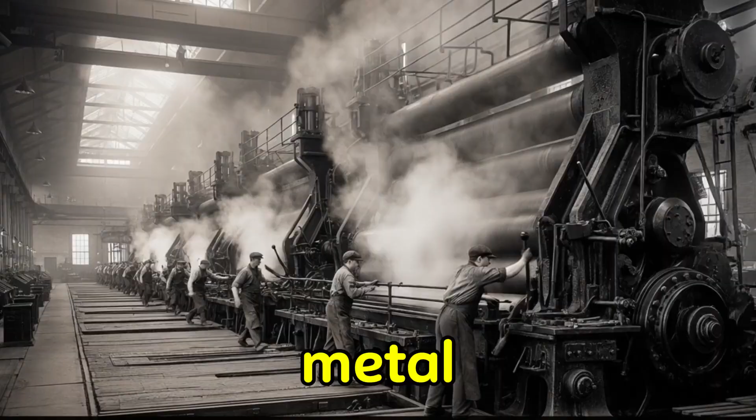Shaking when the morning crew takes their positions. Rolling mills thunder in sequence. Steam hisses through iron pipes bolted high in the rafters, and the air carries the permanent smell of hot metal and coal smoke. Workers shout to each other across the floor, but the noise swallows their voices before the words arrive.

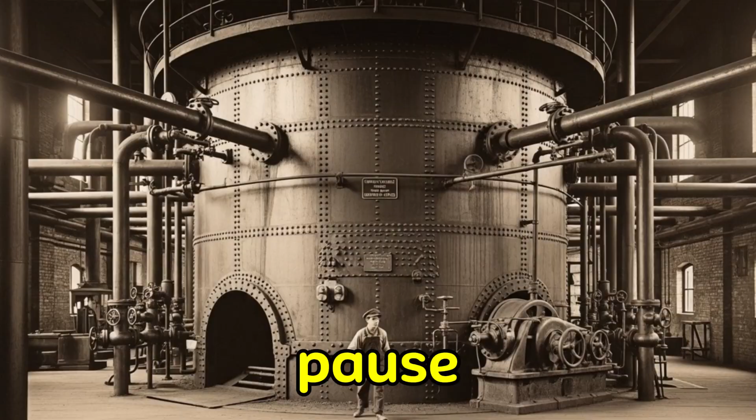At the center of all of it sits a machine most of these men will never see directly, a massive high-pressure steam boiler. It powers the pumps, the furnaces, the rollers, the valves that move molten steel from one end of this mill to the other. Nothing runs without it. Inside the vessel, water presses against steel walls under crushing force. The temperature climbs without pause.

The pressure follows. This boiler has not rested in years. Day shift, night shift, 12 hours at a stretch. Maintenance deferred. Inspections completed on paper, not in practice. Production quotas do not pause for inspections. The steel shell has been failing slowly, scale accumulating on interior walls, microscopic cracks spreading through metal that was never meant to run this hard for this long.

The warning signs exist. No one with authority to stop production is looking for them. Then the men nearby hear something that has no name in their daily vocabulary, a low metallic groan, deep and resonant, like iron being bent past its limit. The boiler ruptures in under a second.

Superheated water becomes steam instantaneously. Steel plates tear apart. Rivets shear free. The force that was powering a steel mill is now moving through the men who ran it. When the air clears, 146 workers are dead. Most never understood what was happening.

The question is not whether this mill was dangerous. The question is who knew and what they chose to do with that knowledge.

America at the turn of the 20th century is being remade from the ground up, and the material doing the remaking is steel. Railroads push across the continent. Bridges span rivers that once stopped cities from growing. Skyscrapers begin their climb into urban skylines. Every beam, every rail, every engine component originates inside mills like this one, vast, deafening, relentless.

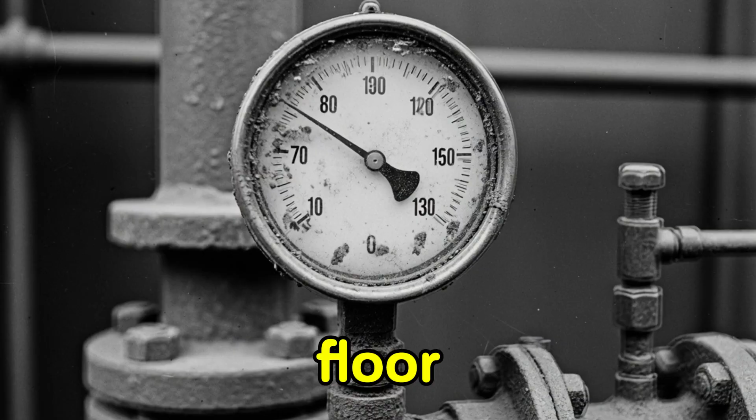By the early 1900s, American steel production has become one of the largest industrial enterprises on Earth. Hundreds of thousands of workers report for their shifts inside these facilities, day and night, without pause. Powering nearly all of it is steam. Before electricity reaches the factory floor, steam boilers are the engines of industry.

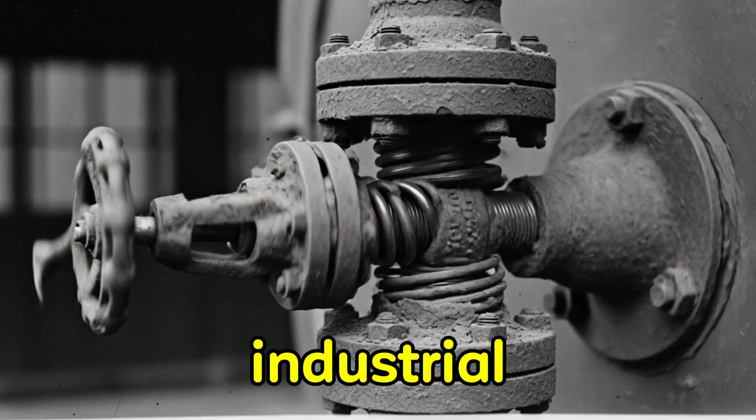Coal burns beneath enormous iron vessels packed with water. Heat climbs. Water becomes steam. Pressure drives pistons, turbines, and rolling mills. The technology is effective, and it is merciless. A standard industrial boiler operates at temperatures exceeding 300 degrees Celsius, under pressures that would destroy an uncontained vessel instantly.

Engineers of the period understand this. Newspapers of the late 19th century carry occasional reports of boiler explosions that level factory buildings and kill dozens of men in a single moment. Some engineers describe poorly maintained boilers in direct terms. Pressurized vessels operating beyond their limits are not equipment.

They are deferred disasters. Production does not slow. Boilers run for years without full inspection. Safety valves exist on paper, and sometimes in practice. Maintenance is scheduled around output, not risk. For the men working the floor, the boiler room is simply background noise.

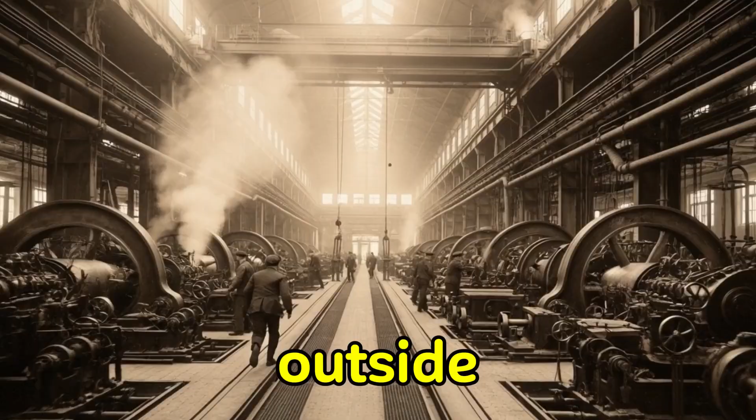Heat, vibration, the low constant rumble beneath everything. They do not think about the pressure building inside those iron walls. Most of them never get the warning they deserve. A steam boiler looks, from the outside, like something built to last forever. It is a massive steel cylinder, solid and imposing, anchored to the mill floor with the permanence of architecture.

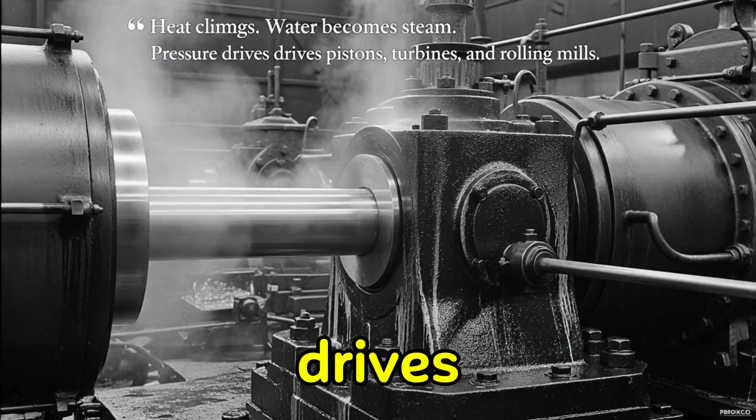Nothing about its exterior suggests what is happening inside. Inside, water surrounds a network of fire tubes. Burning coal drives the temperature upward. The water boils. Steam collects in the upper chamber and builds pressure that travels outward through pipes, driving the engines and rollers that keep the entire mill alive.

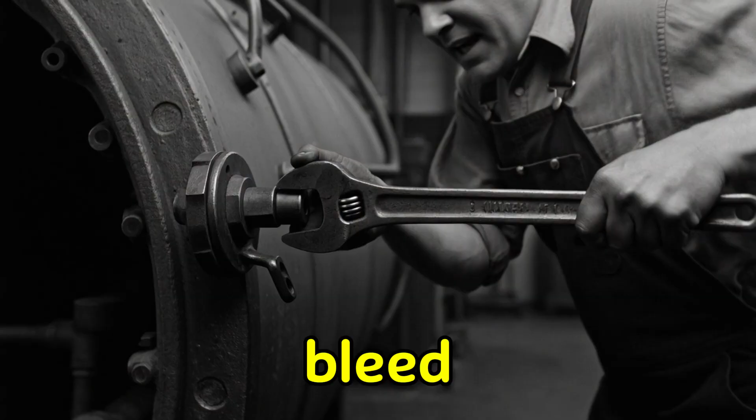The principle is straightforward. The forces involved are not. Industrial boilers of this era operate at pressures exceeding 100 pounds per square inch, pressing outward against every riveted seam and every inch of plate steel. Three safeguards stand between controlled operation and catastrophic failure: pressure gauges that alert operators to dangerous climbs, safety valves that bleed excess steam before the vessel ruptures, and scheduled inspections that catch corrosion and cracking before they progress.

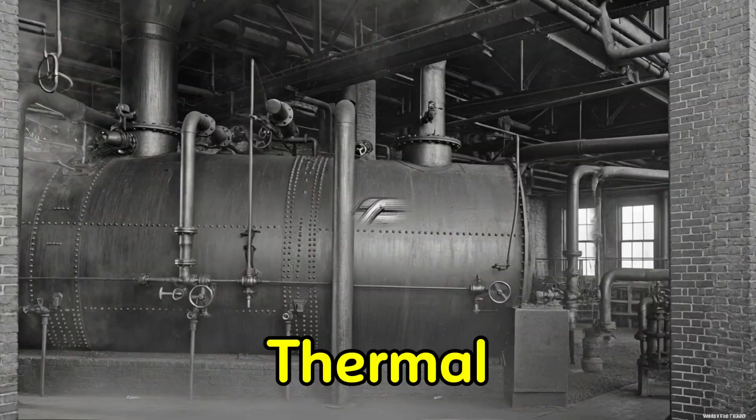All three require maintenance. In mills where production dictates the calendar, maintenance comes last. Coal combustion leaves mineral deposits called scale along the interior walls. Scale creates uneven heating. Metal expands and contracts under repeated thermal stress. Microscopic fractures develop along the seams where riveted plates meet.

None of this is visible from the outside. To the worker crossing the floor, the boiler looks exactly as it always has: stable, warm, functional. The damage is internal and cumulative and silent. Every uninterrupted shift adds stress to metal that has already been stressed. Every postponed inspection allows fractures to widen by fractions that will eventually become fatal measurements. The boiler does not announce when it has reached its limit.

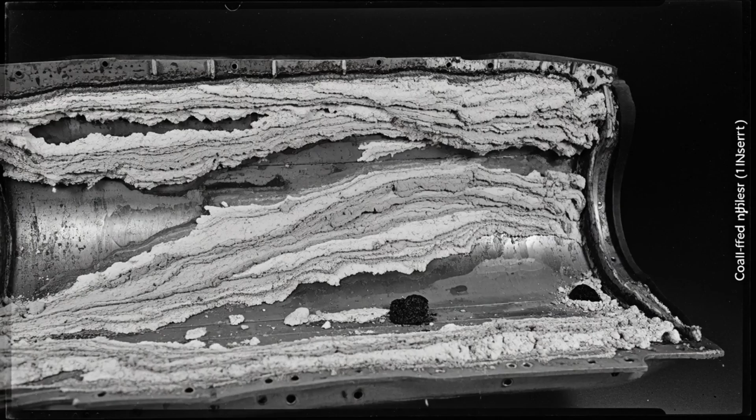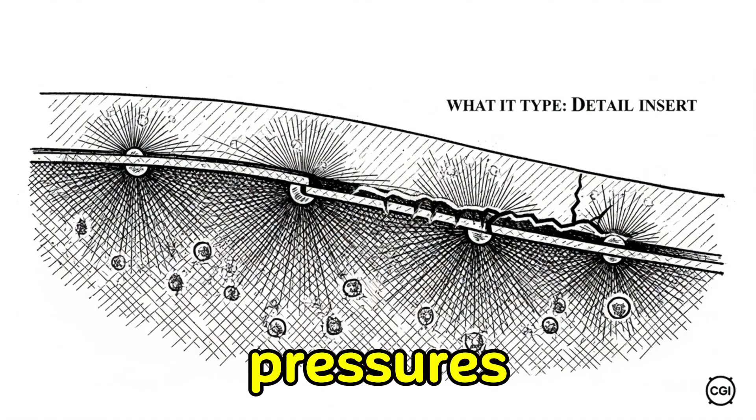It simply reaches it. By the late 19th century, boiler explosions are not rare events. They are a documented pattern, repeated across American industry with enough frequency that engineering journals publish formal warnings about them. Investigators examining failed boilers find the same conditions each time: corroded metal that has gone unrepaired, safety valves that stick or leak, pressure gauges that read inaccurately, operating pressures pushed beyond what the vessel was built to sustain.

The causes are not mysterious. They are recorded, analyzed, and published. The industry reads these reports and continues operating.

Workers notice things that inspectors sometimes miss. A sharp knock from inside the boiler casing. A steam valve that weeps constantly along its seal. A low vibration that changes pitch during peak load hours. These sounds and sensations are part of the daily vocabulary of mill life, and experienced men learn to read them as signals.

But a worker who raises concerns about a boiler is not an engineer with authority to order a shutdown. He is a man whose wage depends on the mill remaining in operation. Steel furnaces do not cool quickly. Rolling machinery tied to a boiler's output cannot simply pause. Stopping production to investigate a sound inside an iron shell is not a decision most floor workers are positioned to make.

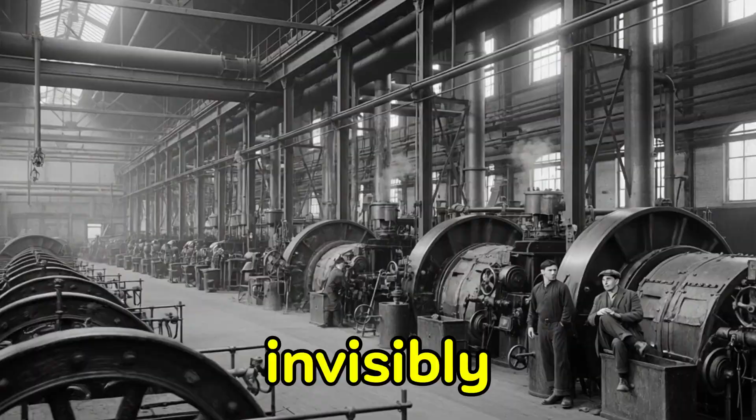So the scale continues accumulating along the interior walls, trapping heat unevenly. The metal continues cycling through expansion and contraction with every shift. The microscopic fractures in the riveted seams continue widening, invisibly, while steam flows through the pipes and the mill turns out steel on schedule. From the outside, the machine is performing exactly as required. What is happening inside the shell is a different matter entirely, and the gap between those two realities is narrowing.

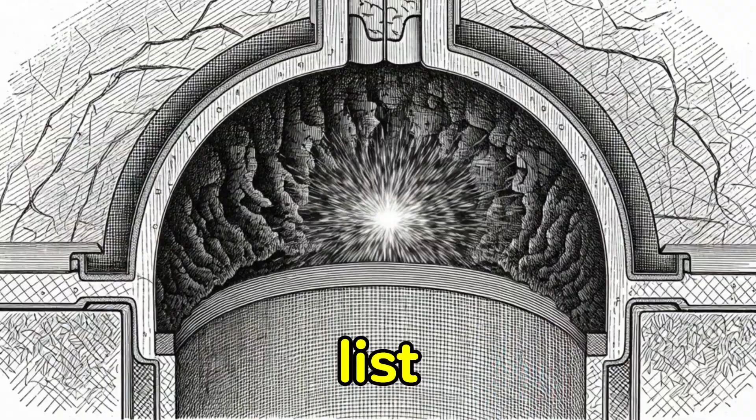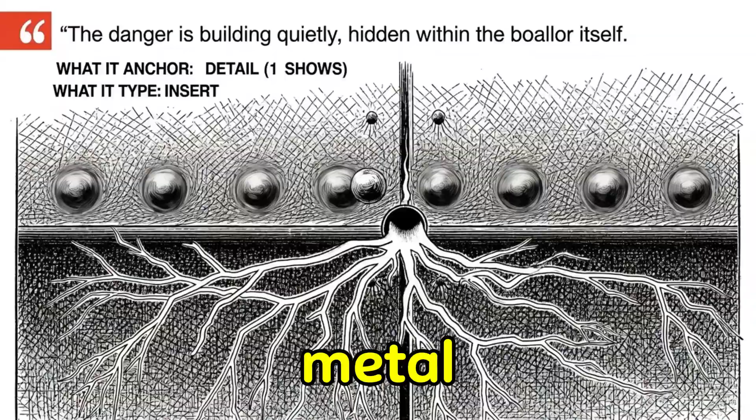This is not one story. It is the same story, told in different cities, in different years, with different names on the casualty lists. Across the United States, boiler explosions tear through factories, rail yards, sawmills, and riverboats throughout the industrial era. Newspapers carry the accounts in similar language each time. A building reduced to scattered timber and bent steel, men killed instantly by fragmenting metal, survivors pulled from the wreckage with burns that cover most of their bodies.

Some explosions destroy a single room. Others level an entire production block, leaving a crater where machinery once stood. Investigators arrive at the ruins and find conditions that have become familiar through repetition. Worn plate metal. Sheared rivets. Safety valves seized in the closed position. Operating logs showing the boiler had run continuously for years without a full internal inspection.

Each incident is recorded as an isolated event. Industry does not treat the pattern as a pattern. Owners repair the structure, install a replacement boiler, and return to production schedules. The economic logic is direct and unspoken. The cost of comprehensive safety reform exceeds the cost of absorbing periodic disasters.

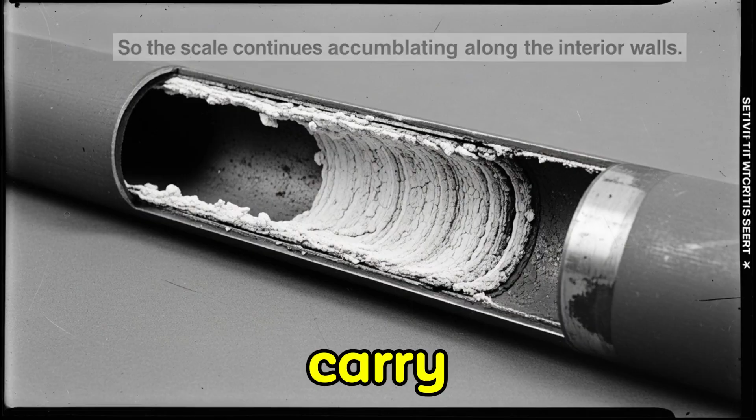Steel demand does not pause for investigations. Construction contracts do not extend deadlines for grief. Workers carry their own private accounting of the risk. In factory slang, aging boilers earn names that acknowledge what they are. Men who spend shifts within the blast radius of a failing vessel understand, in practical terms, what survival odds look like in an enclosed building when pressurized steel ruptures.

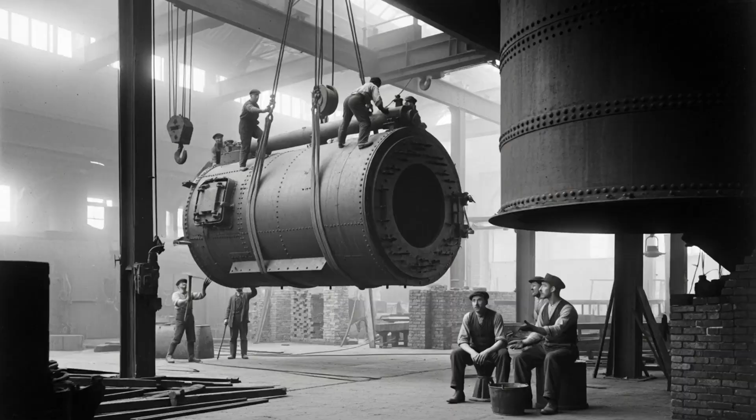They report for work anyway. Their families require the wages, so the boilers keep running. The pressure inside keeps building. The metal keeps weakening along seams that no inspector has examined in years. The next preventable disaster is already in progress.

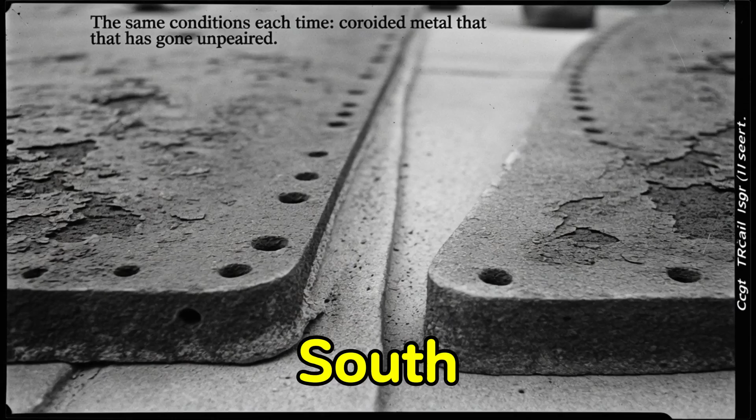The mill does not exist in isolation. It generates a world around itself. Within walking distance of the factory gates, rows of modest homes line streets that exist because the mill exists. Boarding houses absorb the steady flow of immigrant laborers arriving from Eastern Europe, from Ireland, from the American South, all of them drawn by the promise of steady wages in steel. Small shops and taverns open near the entrances, their hours aligned with shift changes.

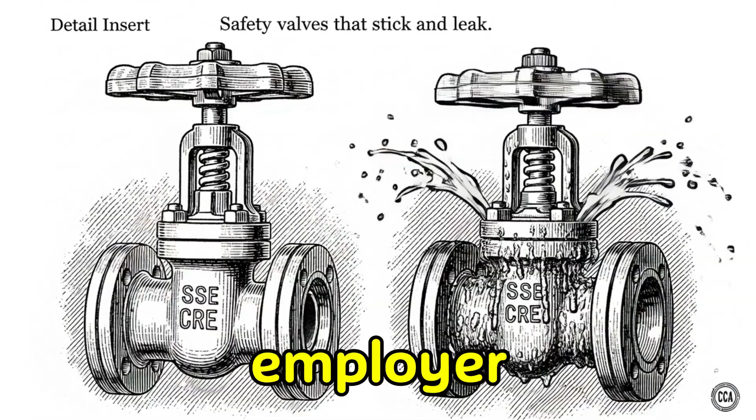The mill is not merely the largest employer in these neighborhoods. It is the economic foundation beneath everything else. The reason the street exists, the reason the church was built, the reason families settled here rather than somewhere else.

The shifts run 12 hours. During heavy production cycles, longer. Workers move between blistering furnaces and the machinery those furnaces power, breathing air that carries the permanent smell of coal smoke and hot iron. Sweat dries before it forms in the heat zones nearest the rolling equipment.

Children in these neighborhoods grow up calibrated to the mill's rhythms. Shift change whistles mark the hours. The low engine rumble carries through walls at night. Steam venting from pressure lines is as ordinary as weather.

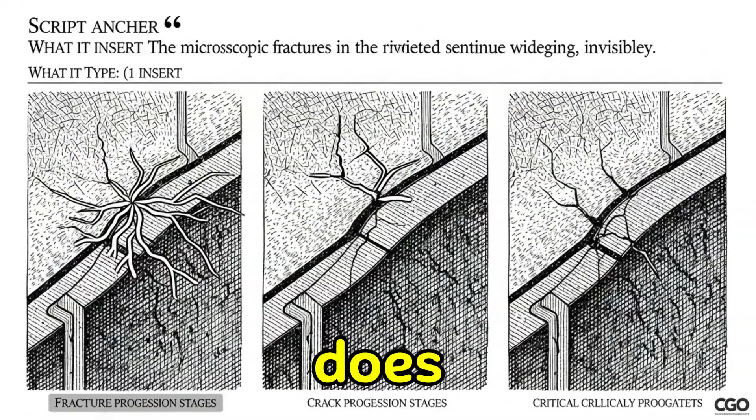Danger is understood here, but it is understood as individual and manageable. Men lose fingers to machinery. Occasionally someone does not come home. These losses are mourned and then absorbed, because the alternative, leaving, refusing the wage, is not a realistic option for most families. The boilers behind the brick walls are part of the permanent background of this life.

They have always been there. They have always worked. That assumption is about to cost this community everything. The disaster does not announce itself.

It begins as a sound. Inside the boiler, coal fires have been driving pressure upward through the shift. Steam fills the upper chamber. The metal shell, compromised along a riveted seam by years of corrosion and scale buildup, absorbs the load the way it always has.

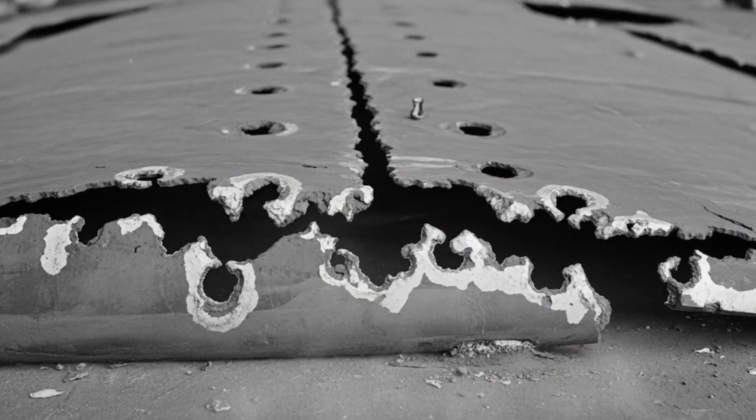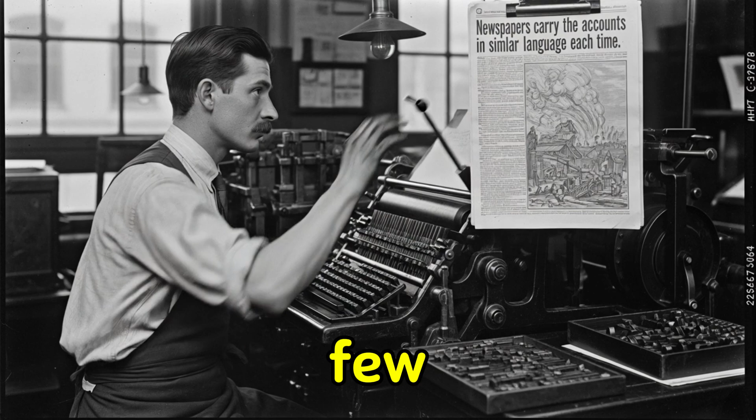Until the point where it cannot. The deformation starts too small to see. Then the steel begins to tear. Workers on the floor hear a sharp metallic crack, short and clean, cutting briefly through the machinery noise. A few turn toward it. The sound is unfamiliar but carries no immediate meaning. There is no established signal in a steel mill for what is about to happen.

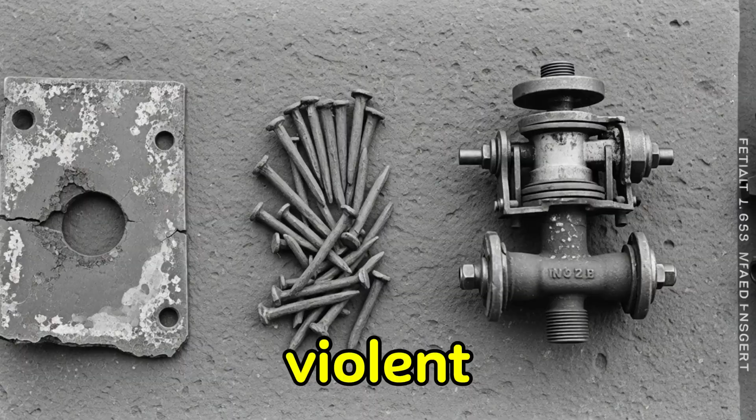The rupture spreads in fractions of a second. Thousands of gallons of superheated water convert to steam instantaneously. The expansion is violent and total. Steam volume hundreds of times greater than the liquid that produced it, seeking release in every direction at once. The energy involved is equivalent to a military explosive detonating inside a building full of men.

Steel plates separate from the vessel and cross the mill floor at lethal velocity. Rivets become shrapnel. The blast wave hits before anyone can process what generated it, throwing men from elevated positions and driving equipment into walls. Superheated steam floods the immediate area.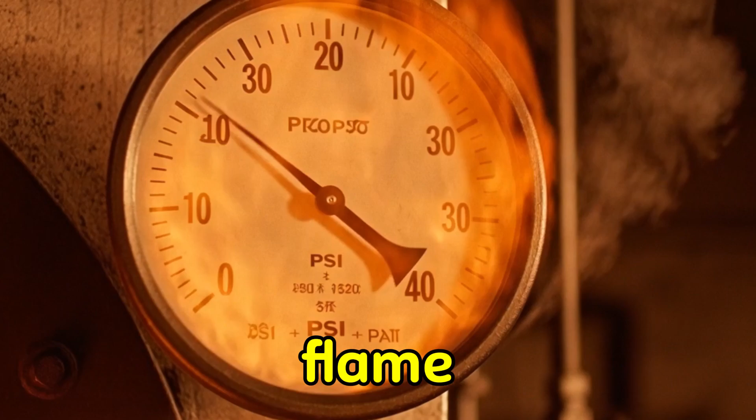At its temperature, exposure is not painful. It is fatal. Wooden structural supports ignite. Coal dust suspended in the air finds the flame. Sections of the building begin to fail as the framework loses integrity.

Men who are able try to move toward exits. The building is already coming down around them. The noise fades. The steam thins. The scale of what has just occurred begins to take shape in the settling dust.

The blast wave does not stop at the boiler room. Through the mill the wave force always moves through enclosed space, outward, into everything. Machinery bolted to concrete foundations tears free. Overhead cranes buckle against their rails. Every window in the facility shatters simultaneously, sending glass outward into the yard.

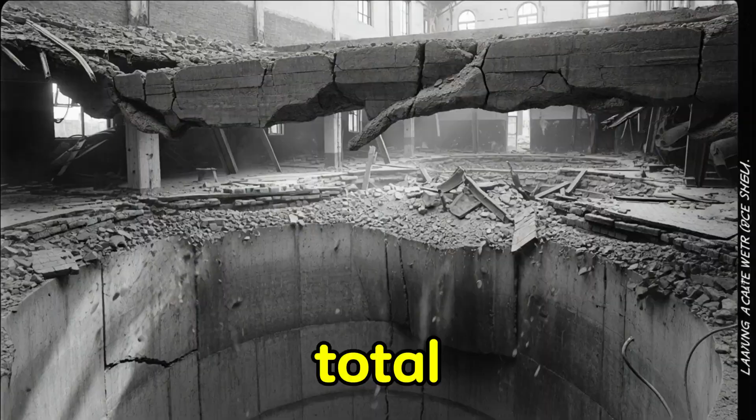The pressure differential is so sudden and so total that the building does not absorb it. The building transmits it. Boiler fragments continue traveling after the initial detonation. Some of these pieces weigh hundreds of pounds. They do not slow when they reach brick walls. They pass through them, carrying sections of roof beam and pipe fitting into neighboring structures.

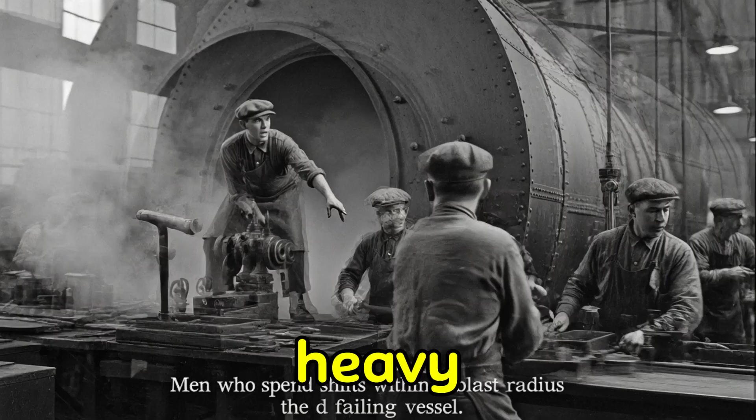Workers positioned far from the boiler room are struck by debris that arrives without sound, without warning, faster than any human reflex. The explosion ruptures steam lines running throughout the facility. Scalding vapor floods corridors and secondary work areas through broken pipe ends, filling enclosed spaces with heat that renders them impassable within seconds. Wooden roof supports, never designed to absorb this kind of shockwave, splinter along their lengths. Heavy equipment drops through floors weakened by the structural failure above.

Outside the factory walls, the neighborhood registers the event before anyone understands it. Windows crack in homes on adjacent streets. Residents step outside to find a column of smoke rising above the mill complex, dark against the sky.

Inside, the men still standing begin moving toward the sounds of those who are not. But fires are taking hold in the coal dust and broken timber. Steam continues venting from pipes that no valve can now control. Collapsed structural sections block direct paths through the facility. The explosion lasted less than a second. The trap it has created will hold for much longer.

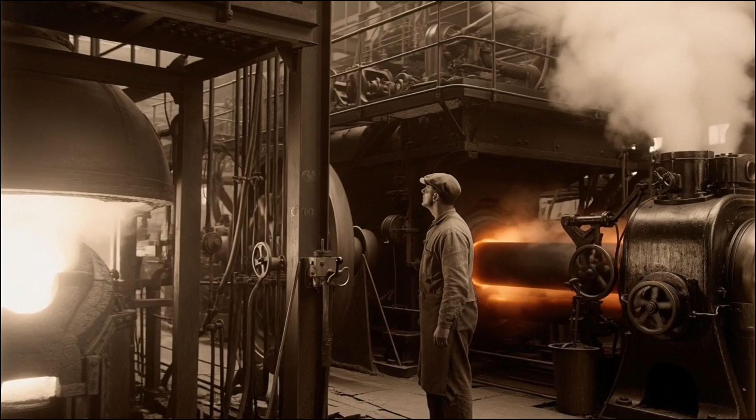When the fires are brought under control and the steam finally stops hissing through broken pipes, the men moving through the wreckage are no longer looking for survivors. They are recovering the dead. Rescue crews pick through collapsed roof sections and tangled machinery in air that still smells of scorched metal and burned coal. Some victims are found near the boiler site, killed by the initial rupture before they had any chance of movement.

Others are located beneath fallen structural beams, or under equipment that the blast wave drove from its mountings. Several bodies bear the specific injuries of superheated steam exposure, burns that require no further explanation to anyone who understands what this boiler contained. The final count reaches 146 workers dead. These are men in their 20s and 30s, mostly. Immigrants who came to this industrial town because the mill offered consistent wages and the possibility of stability.

Fathers whose families live within walking distance of the factory gates, close enough that the sound of the explosion reached their homes before any official word arrived. Entire shift crews are gone. Brothers who worked the same floor on the same rotation. Men who shared boarding house rooms and ate at the same tables.

Funerals run consecutively for days. Black mourning cloth appears on doorways throughout the neighborhood. Church bells toll so frequently they cease to mark individual losses and become instead a continuous presence over the community. The economic consequences arrive alongside the grief.

These households depended entirely on the wages that ended inside that building. Without that income, the question of how families survive the next month is not abstract. The boiler has not merely destroyed a mill. It has dismantled an entire community's foundation in a single shift.

They trace the failure point along a riveted seam where corrosion has eaten through the plate metal over years of continuous operation. They document scale deposits on recovered interior sections, mineral buildup thick enough to have created dangerous thermal gradients across the vessel wall. Witness accounts describe the metallic groan that preceded the rupture by seconds, a sound consistent with a steel structure deforming under pressure it can no longer distribute evenly.

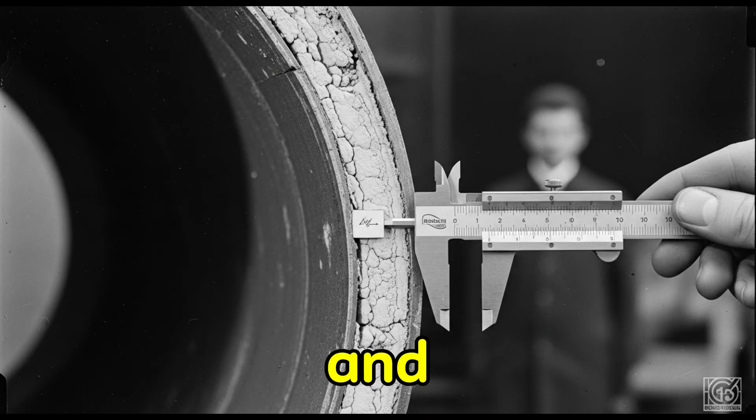The technical conclusion is reached with relative efficiency. Metal fatigue, accelerated by corrosion and scale accumulation, reduced the structural integrity of the boiler below the threshold required to contain its operating pressure. The vessel failed. The stored energy released. 146 men died.

The mechanical explanation is accurate. It is also carefully bounded. The investigation examines the component that failed. It does not, with equal rigor, examine the system that allowed the component to reach that condition. The questions that would require that examination are present in the evidence but absent from the conclusions.

Why did internal inspections not identify the corrosion at a stage when repair was still possible? What maintenance records existed for this vessel, and who held responsibility for acting on them? Who made the operational decisions that kept this boiler running beyond the point where its condition warranted shutdown?

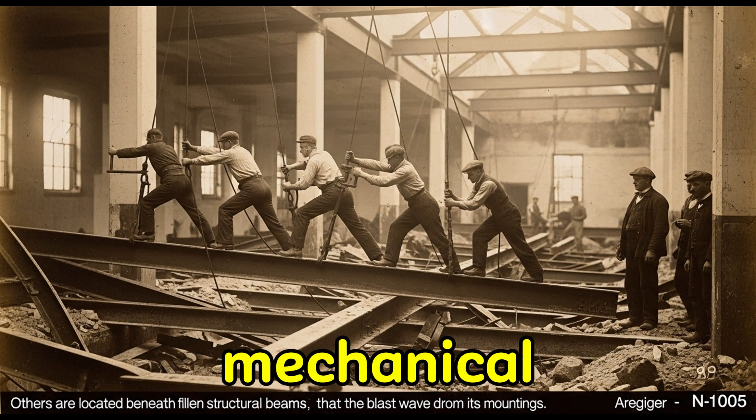The final reports describe a mechanical failure. The decisions behind that failure are recorded as context, not cause. The file is closed. The mill begins planning its reconstruction.

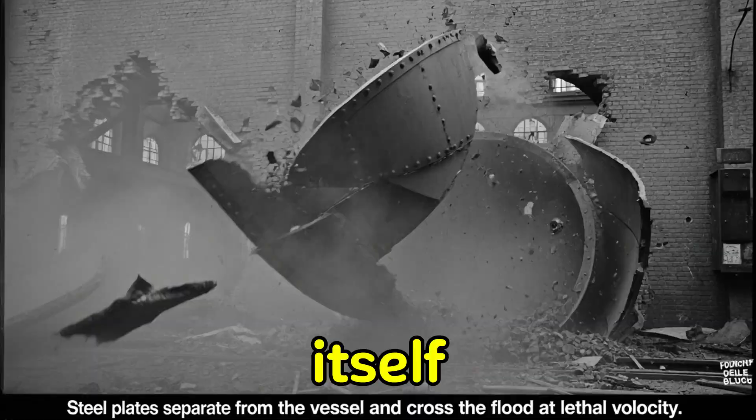A boiler does not neglect itself. The decisions that leave a pressurized vessel running on corroded metal and missed inspections are made by people, inside an economic structure that consistently rewards those decisions.

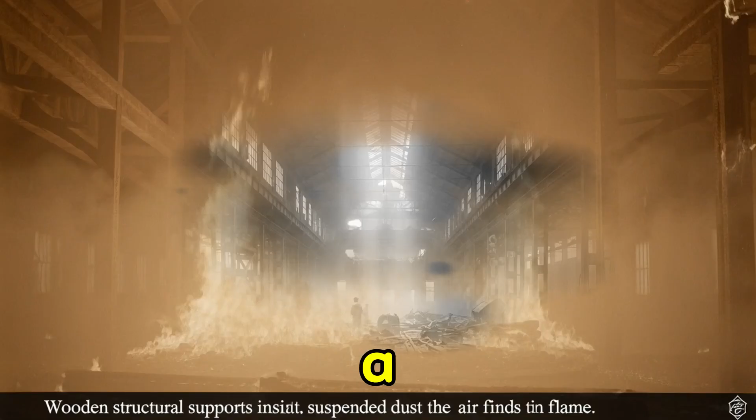Steel mills in the early industrial era operate inside intensely competitive markets. Contracts carry delivery deadlines. Furnaces and rolling machinery must produce on schedule. Every hour a boiler sits offline for inspection or repair is an hour the mill is not generating output, and that cost is immediate and measurable.

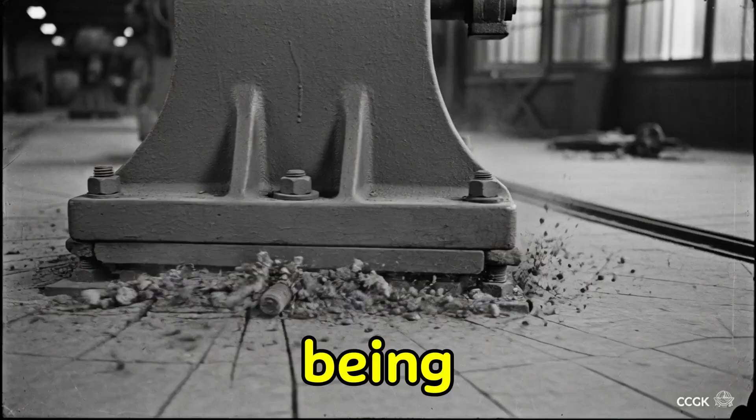The cost of a catastrophic failure is deferred, uncertain, and distributed across workers, families, and a community that has no formal mechanism to recover it. So maintenance is postponed. Inspections are abbreviated or recorded without being fully performed. Boilers remain in continuous service well beyond the intervals that engineers, in published literature, identify as safe operating limits.

Workers in these mills carry the consequences of decisions they do not make. Early industrial labor operates almost entirely without formal protections. A man who refuses an assignment on the grounds that nearby equipment is unsafe does not trigger a safety review.

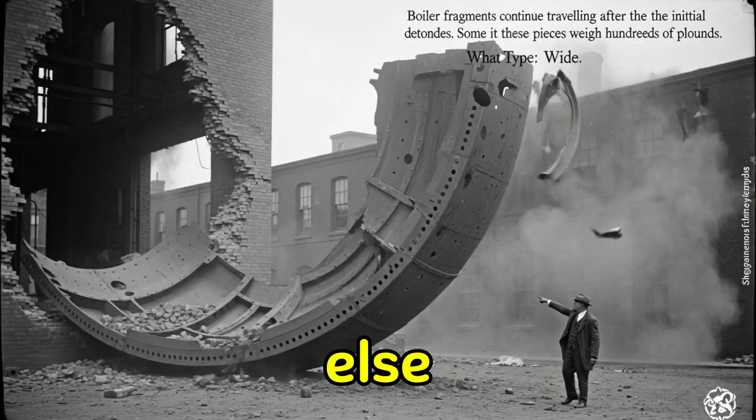He triggers his own termination. The job goes to someone else. His family absorbs the result.

This dynamic does not belong exclusively to steel. Across the industrial era, the same structure produces the same outcomes in mines, in textile factories, in rail yards. Equipment degrades past safe operating limits. Workers are present when it fails. Investigations describe mechanical causes. The economic logic that produced those mechanical conditions is noted and then set aside.

The boiler that kills 146 men is not an anomaly within this system. It is the system made visible.

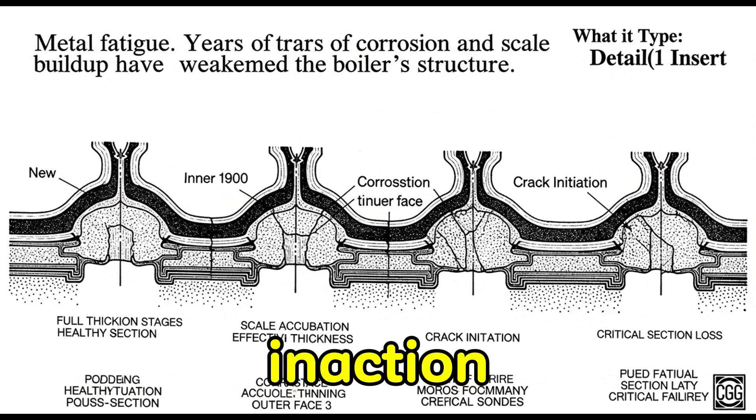Reform does not arrive with the rescue crews. It arrives years later, incrementally, and only after the accumulated weight of similar disasters across the industrial world makes continued inaction politically untenable. In the aftermath of preventable boiler explosions throughout the era, some regions begin enacting stricter inspection requirements.

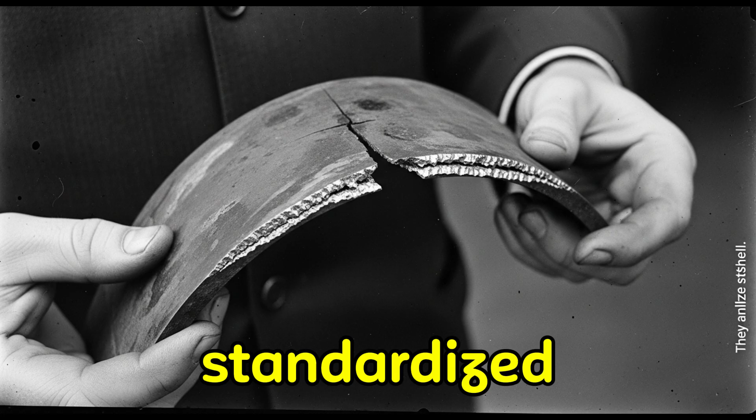Engineers advocate for standardized safety valves and pressure gauges that can be tested and certified rather than trusted by assumption. Professional boiler inspectors, independent of the facilities they examine, become more common.

These measures reduce the frequency of catastrophic failures. They do not eliminate them, and they arrive only after the deaths that made their necessity undeniable.

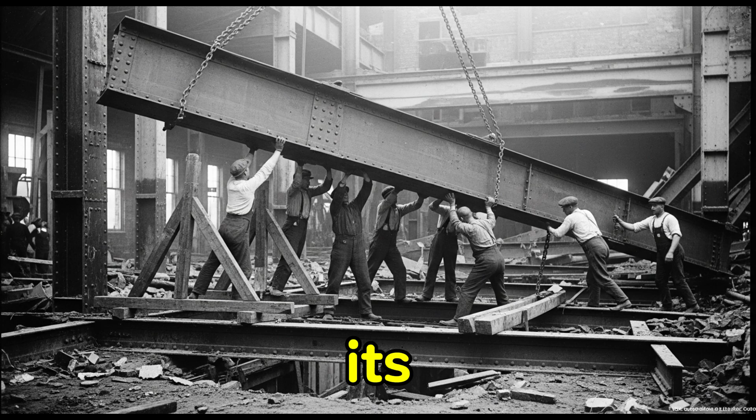The mill itself eventually reopens. New boilers are installed in place of the destroyed vessel. The furnaces return to temperature. Steel moves through the rolling machinery and out the factory gates. Production resumes its rhythm, and the industrial economy absorbs the disaster the way it absorbs all such events, as a delay, not a reckoning.

The 146 workers do not resume anything. What their deaths leave behind, beyond the grief that reshapes the community around the factory, is a record.

A documented instance of what happens when corrosion is left to progress, when inspection schedules are subordinated to production schedules, when the people closest to dangerous machinery are given the least authority over the conditions surrounding them.

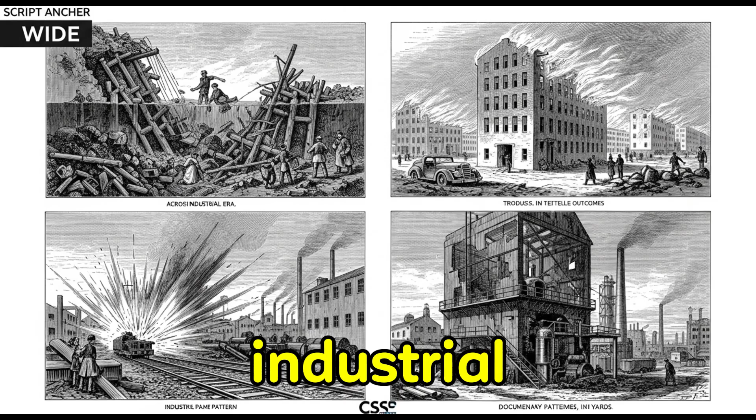Modern engineering standards and regulatory frameworks have made industrial boilers significantly safer than they were in this era. That progress is real, and it matters that it was purchased at a price that was never fairly distributed.